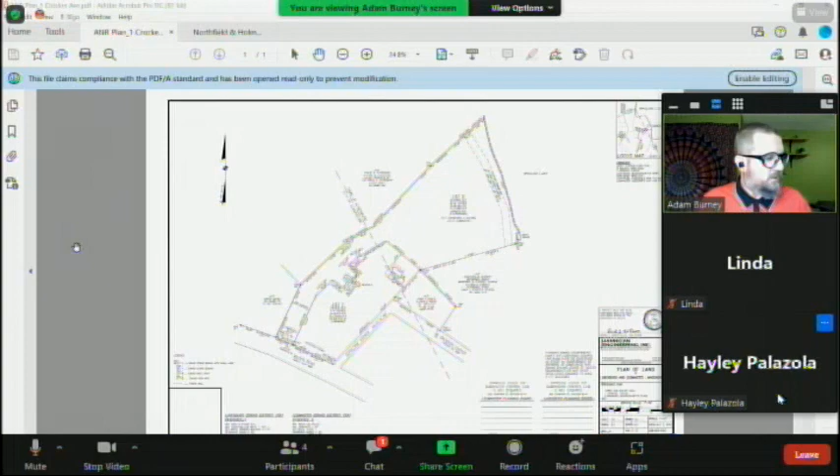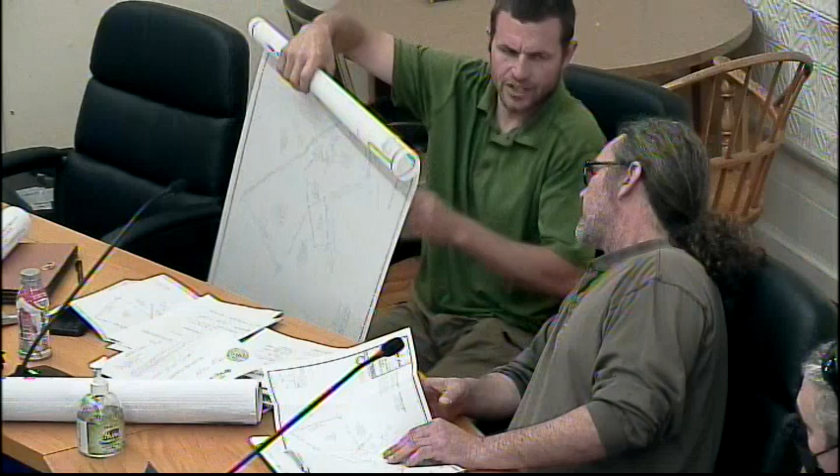I have a question for Adam, our land use director. Do we have approval from Leominster? I believe it's on the Mylar. I know the Mylar was dropped off probably end of last week, and I believe it had Leominster's endorsement on it. There's only one signature. I'm not sure if they allow their chair to sign. Did they allow that, Adam? There's only one signature on the Mylar. My guess would be that they've authorized the chair as the signature. Okay, good enough. I can attest to that. Thank you.

So basically, you're meeting the reduced frontage lot requirement for the lot size? Yes, sir.

This is certainly a unique situation. This is the first time I've seen something like this, for sure.

Have you had any discussions with the building inspector in Lunenburg? I personally haven't yet. But I can say that I know the water and the sewer will be municipal through Leominster, stuff like that.

This is not necessarily uncommon, though it's not something that happens every day. Most often, if the lot meets the requirements of frontage in the community where the frontage is, and lot size in the community where lot size is, these are permittable. They have frontage on a public road, and their lot, even if it were wholly Lunenburg, would be compliant. Often what happens in these instances is whichever community the building is located in takes the lead on permitting from a building perspective. We had a similar lot off of New West Townsend Road, and the building commissioner spoke with the building commissioner in Fitchburg. The frontage was in Lunenburg and met our frontage requirement, but the building was being constructed in Fitchburg, so the Fitchburg building commissioner would have been the approving authority on the permit and the inspecting authority as construction happened. I would expect a similar situation here, and based on the shape of the lot, the house would have to be in Lunenburg.

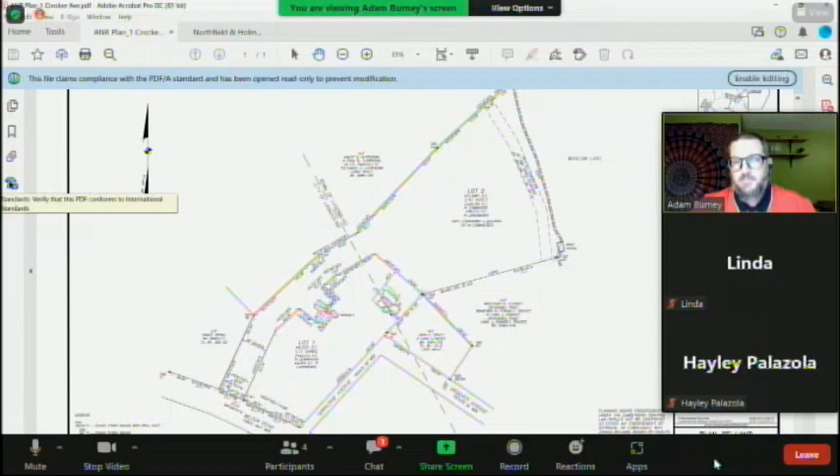Now, it's not unusual for us to see the 175 width dimension on our plans. That's not a requirement for the ANR, right? It is not. Okay, but you're aware that we have it. Yes, sir.

Certainly a complicated situation. I don't think I see anything that precludes the ANR portion. No, I don't see a problem with it. I would just caution you, I'm sure you're aware, that it's subject to the building commissioner's approval and whatnot. Yes, sir. So at this point, it's just lines on paper until they file for a building permit, and then the building officer looks at it and says that's conforming. Right.

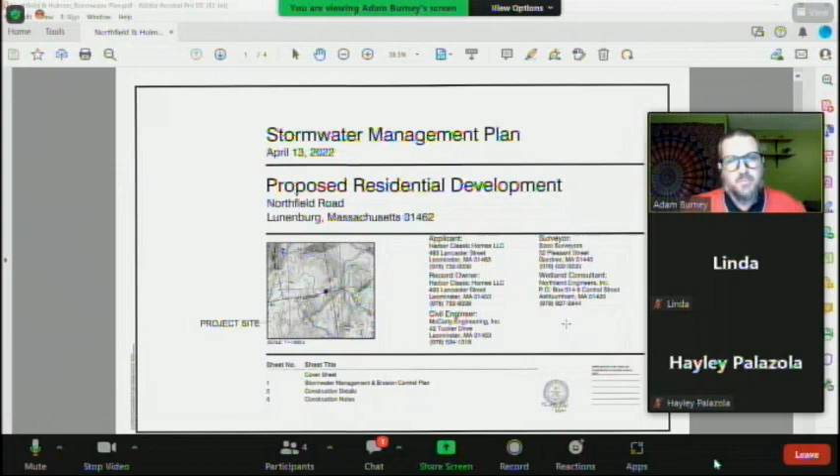Materials are available for viewing at the Planning Office, 960 Massachusetts Ave, Lunenburg, MA. This meeting will be broadcast live through local access cable on Facebook Live, on the Public Access Facebook page, and will be available on the Lunenburg Access YouTube channel within 24 hours after the meeting.

To participate remotely from... can I stop now? Okay, thank you. You said read it all. I follow directions to the T.

Thank you, Mr. Marchetti. Yes, sir, welcome back. Thank you. So, Brian Marchetti here, on behalf of Harbor Classic Homes for the stormwater management permit for an approximate 10-acre parcel on the corner of Holman and Northfield.

This 10-acre piece was subdivided a year or so ago into 6 ANR lots. The parcels have already been designed for a septic system. They've all been submitted by Northland Engineers and received septic approval. So I'm here now for one of the last pieces for the stormwater permit.

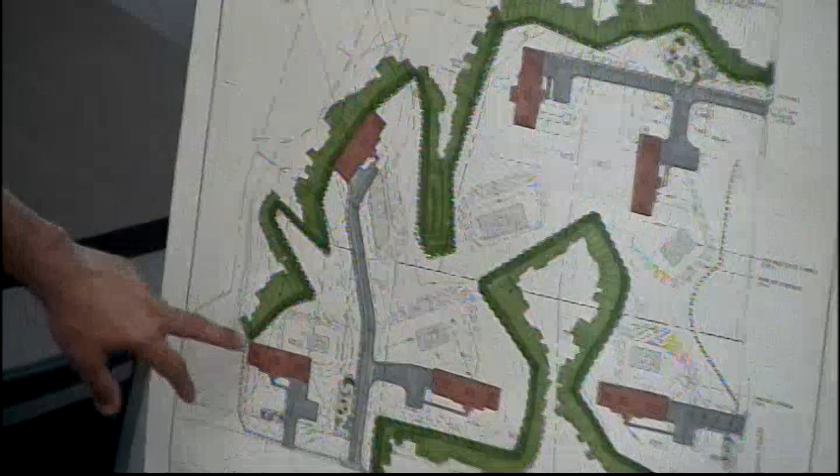So as we said, it's about a 10-acre parcel, divided into 6 lots. Lot A is the house at the southwest corner. Lot A, Lot 1, and Lot 5 are going to be served by a common driveway. Lot 2 is a parcel on its own, served by its own driveway. Then Lot 3 and 4 are off of Holman, also served by a common drive, 3 and 4.

According to the stormwater regulations, the Massachusetts DEP stormwater regulations, on a parcel or subdivision of a property with 5 to 9 lots that does not discharge to a critical area, which is our situation here, the stormwater management standards are applied to the maximum extent practicable. We are meeting all the stormwater management standards with the exception of the peak flow rates for the residential portion.

Also, the town of Lunenburg has its own stormwater bylaw that requires 60% total phosphorus removal and the 1-inch water quality volume. We have met both of those requirements for all the lots except Lot 5, in the rear, at the northwest corner. Groundwater is really high in that location, so even with an at-grade detention basin or rain garden, which we're using for phosphorus removal, we couldn't get a 2-foot separation in groundwater. So we requested a waiver for this lot only, just for the 60% phosphorus removal requirement.

So water will sheet flow off the driveway for Lot 5. It will stage up and be treated through that pea stone diaphragm, and then it will continue to discharge to the west and north to an existing drainage channel located on the western edge of this property.

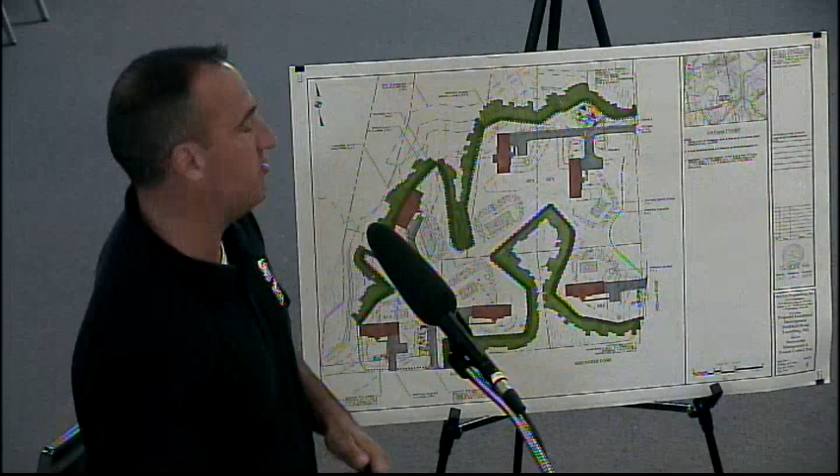So for Lot A, we've provided a pea stone diaphragm along the driveway and then a rain garden along the frontage of the property. For the common drive, we did the same.

Lot 1, the discharge from the driveway will sheet flow to a pea stone diaphragm. It'll be treated in its own rain garden. Lot A and Lot 1 both have a dry well system for rooftop runoff, so it's piped directly to a system below grade where that runoff will be recharged.

Lot 2, it's the same drainage design, with the driveway discharging to a pea stone diaphragm along the edge of the driveway, and it discharges again to a rain garden. And then we did the same thing for Lot 3 and Lot 4.

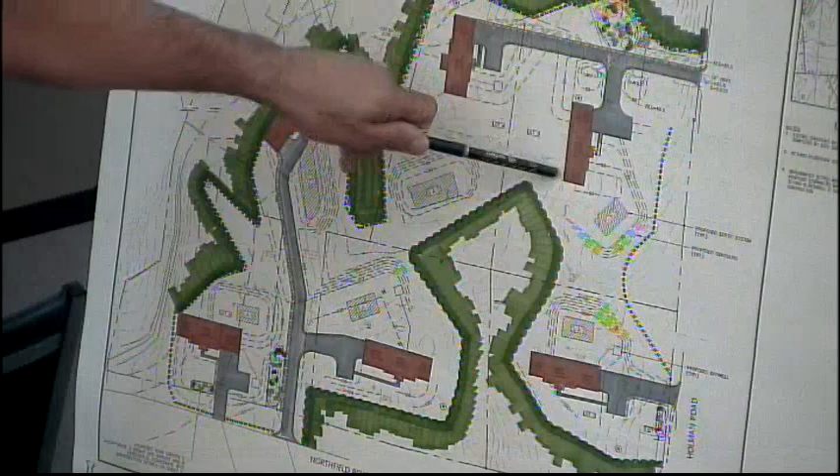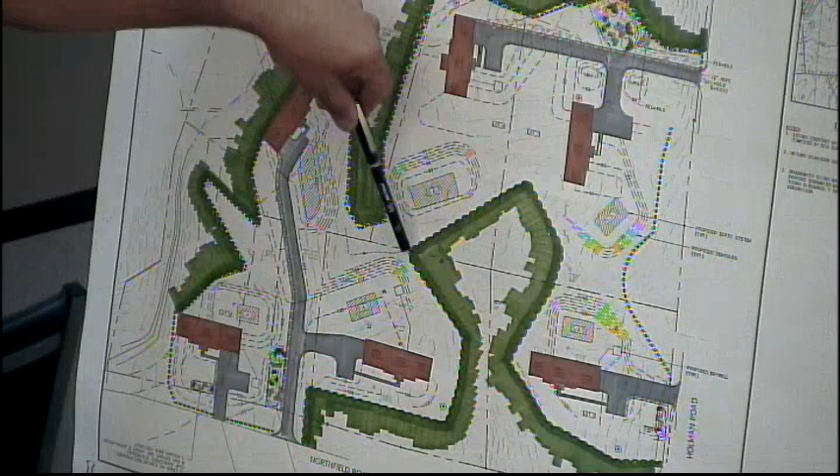In combination, the rooftop for Lot 3 discharges directly to grade and is actually culverted. Some will be collected in the rain garden that's across the driveway, but some will be discharged through a culvert under the driveway. We had to design 2 culverts here because the flows from the majority of this property all trend in that northeast direction.

So instead of allowing the runoff to just sheet flow across the driveways, which could lead to erosion in the future, we put small depressions in the yard with a culvert so it would be directly discharged underneath and controlled, so the driveway would never be flooded.

But again, Lot 3 and 4 both discharge to a pea stone diaphragm, and they're both directed to a rain garden system here to be treated and obtain that 60% phosphorus removal before they discharge off the site.

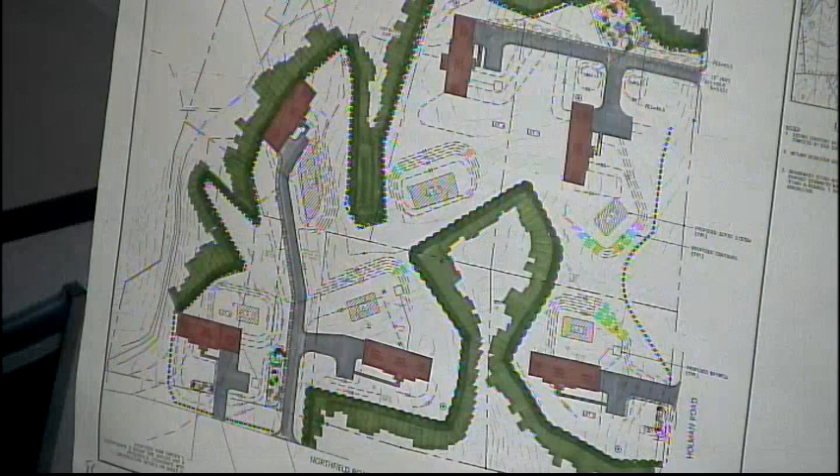So this drainage design was submitted to Graves Engineering, the town's review consultant. They did provide a letter back to us this afternoon. If I could go through, there are 6 comments, but there's really only 1 comment that requests some sort of plan change.

So I'm sorry, we don't have that, right? You do. We do. You should have. Yep.

Comment number 1 was, even with the implementation of the proposed stormwater best management practices, the post-development peak runoff rates will be greater than the pre-development peak runoff rates. Per section 204-1C9, the rate of runoff is required to be equal to or better than pre-development conditions. But furthermore, Section 204-1F2C requires that the stormwater management system design shall be consistent with the intent and guidance provided by the latest Massachusetts Stormwater Handbook. Per the handbook, the stormwater standards apply to the maximum extent practical for residential projects consisting of detached single-family dwellings, provided there is no stormwater discharge that may potentially affect a critical area. In GEI's opinion, the proposed stormwater management system meets the intent of Section 204. GEI defers to the planning board for further consideration, if any.

So this is consistent with all the other stormwater management permits that we've come before the town and permitted previously. Because they're residential developments, the stormwater management standards don't apply. But for developments with 6 to 9 lots that don't discharge to a critical area, they can meet the standards to the maximum extent practicable. So short of routing the entire system to a big centralized drainage system, typically the peak flow rates are the hardest ones to meet.

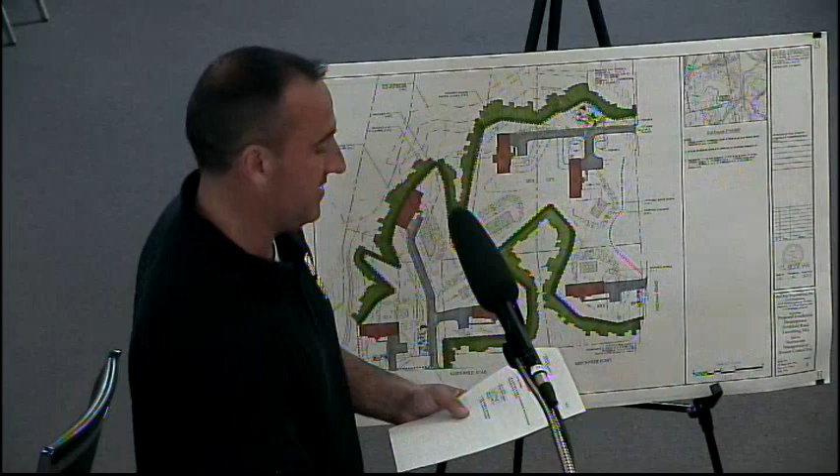Then comment number 4 and 5 both concur that the hydrology computations are found to be in order, and 5 is that compliance with the Mass DEP Stormwater Handbook is reasonable. And then comment number 6, GEI has no issues with our general engineering comments.

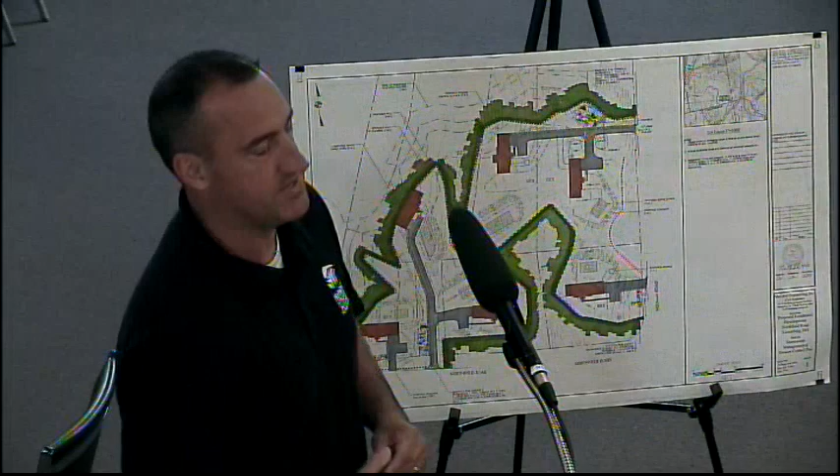We can answer any questions you have. And based on Graves' letter, it seems like the only modification to the plan is going to be to add a note for zoning for these lots.

And there's one other item that came up this past week. This site is being separated between a couple different engineering companies. Northland Engineers did the septic designs and the notice of intent, but they had us do the stormwater management design.

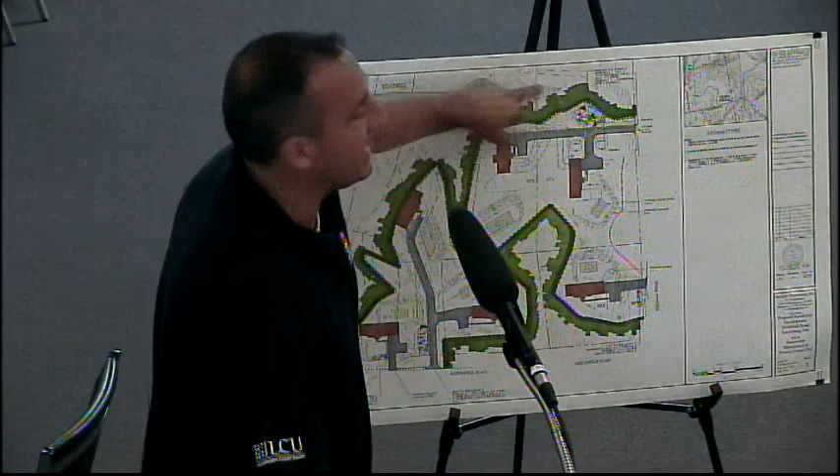Conservation had a comment that we had a house within one of their buffer zones, within a no-structure zone, but that's not the case.

All right, let's open it up to board comments, and then once we've gone through any comments and concerns for the board, we'll open it up to any public comment if we have anyone from the public that would like to comment on this.

Correct, yep, we have the one waiver request.

Not that I think we need to have the drainage calculations for every project, but this is the first one I noticed that we don't have them. You said you didn't meet the rate. Yeah, all the drainage calculations were submitted. I'm sure they're listed here on the Graves report. I'm just surprised they're not in front of us, which is fine because it's a huge amount of paper that we don't usually look at.

Can you tell us what the overages were? I printed myself the abridged version, so I didn't have to bring the whole report. For the 2-year storm, let's see here. So let me see here.

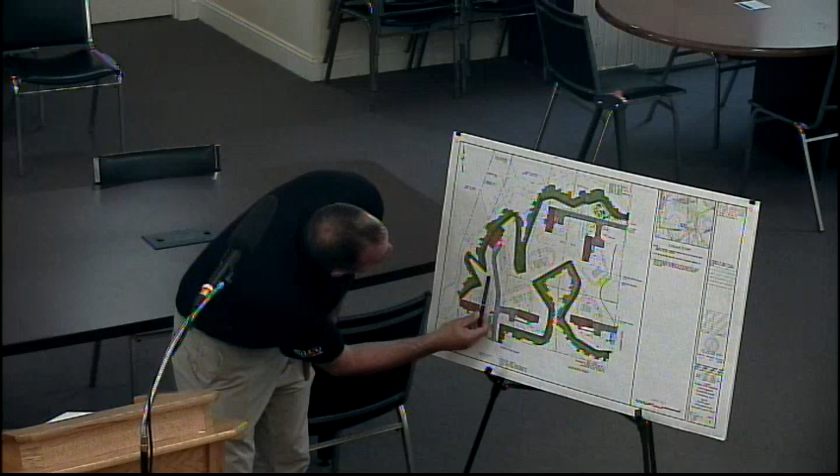So you don't think you could build something with a 2-foot separation from groundwater to the bottom and then size it enough to capture? No, not without, because we're running down, we're at 104 here, 103 in here, so we've raised the grade to get the driveway up higher so we could get the flows to get down there. Otherwise, this area is really flat, so there's, I would say, less than a 1% pitch across the yard here to get back to that.

And the septic system has to be incorporated into all the grading around this. Based on the test pits in the septic system design, that's why we're at 105 in the septic system. That gives us that minimum separation in groundwater here.

And speaking of septic systems, do you have the reserve trenches between the primaries? I'm not exactly sure how that was laid out. We didn't do the septic designs, Northland Engineers did, so I don't see any reserves.

The blurb you see for SAS on all these lots, the grading accommodates all of the primaries. So the reserves are adjacent to them, but none of them are to the wetland side. They're all within the footprint of the development.

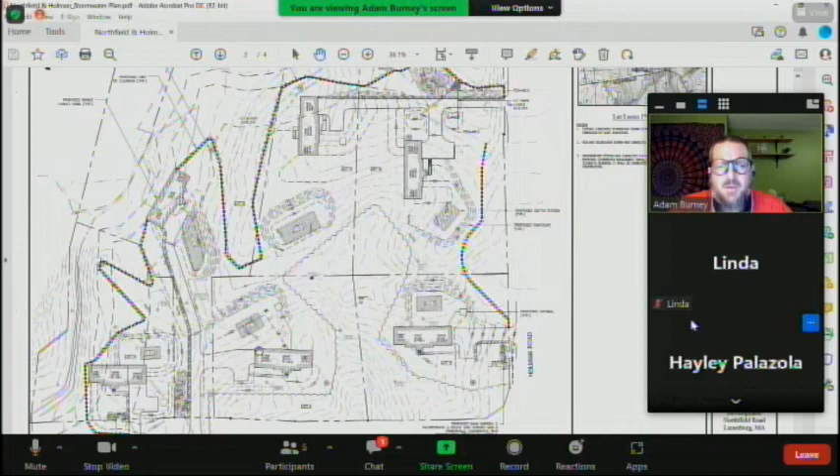I'm not clear on the Holman Street common drive. I thought it was intended to split the lot line. I do remember you giving relief on the Northfield common drive for the location on Lot 5 alone. If I'm recalling correctly, it was a scenic road issue where there was a piece of the wall that was not as substantial as the other wall, and the argument was made that that would be a great place for a common driveway, and the board agreed.

Yeah, that was my recollection, that on the Northfield Road side we granted a common driveway for those two lots. So lots 1 and 5 would be serviced by a common driveway that wasn't divided by the lot line, to minimize the disturbance to this scenic road and the wall. That is also my recollection. And I think at the time there was not a formal...

...location for the homes on lots 3 and 4. They had indicated that they intended to do a common driveway, but they were unsure what the layout would look like. They were waiting on soil testing for their septic systems, and that was going to drive the layout of where they put the houses and how the driveway interacted with Holman Street.

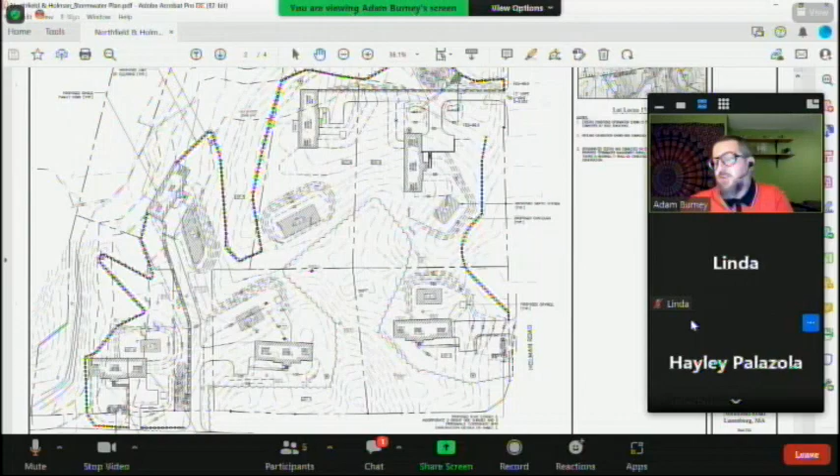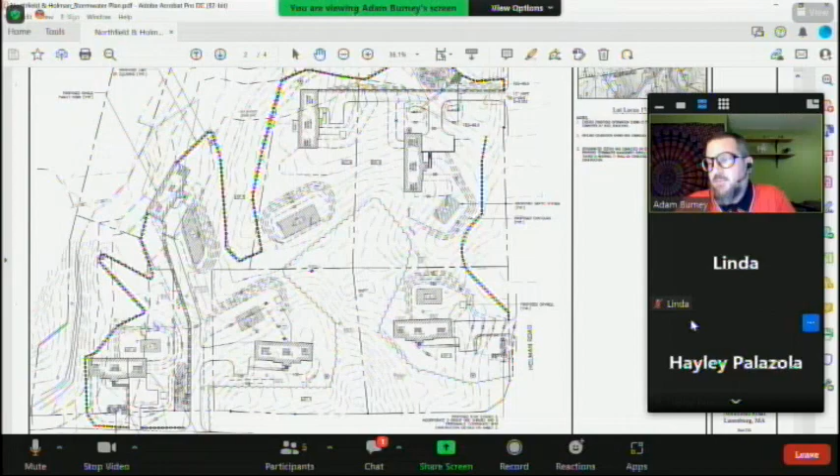I think the example would be much like Lot 5. By the definition, Lot 1 has no frontage because access is being provided through another lot's frontage, and that's permissible under the common driveway statute for specific reasons the board felt were appropriate. I'm not saying the other instance meets those same requirements, I'm saying the presence of that bylaw negates the requirement that you access through your frontage.

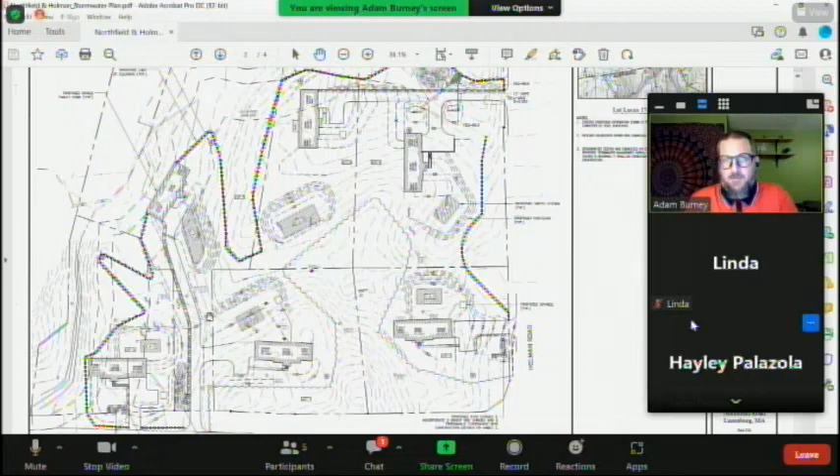I'm just realizing that Lot 4 is landlocked on this plan. It's a scary thing, because its property lines both go past the wetland boundary. So we apparently approved an A&R that was inaccessible.

I don't believe the presence of wetland is enough to disqualify approving the A&R. Even if it's a full blockage, it has to create a truly illusory access issue, and just wetland that could theoretically be approved to be altered by the Concom doesn't qualify as a problem for A&Rs. I'm working from memory on that, about a year and a half old, but I'm pretty sure that's correct.

We had a similar issue on another A&R and had that discussion, and that point was brought up, but there were a couple of interpretations of that. I think to the extent that we need to address the stormwater permit, that's really what we need to focus on, and to the extent these issues play into that, we need to address them, but some of this is certainly outside the scope.

I don't disagree with you, because this is outside the scope of the stormwater permit, but as I said already, we received a bunch of hand sketches on napkins and approved a bunch of stuff. We kept asking for better sketches, better sketches, better sketches. We did not get them. I'm not happy at all with this.

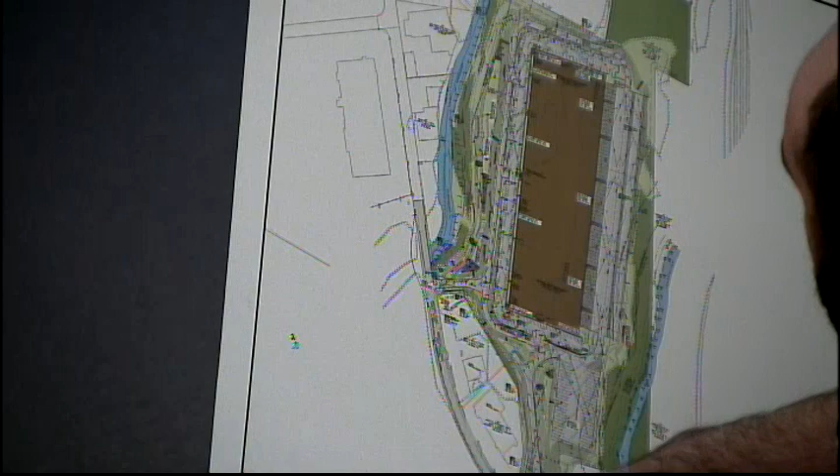Just to give a quick overview, currently this is a property that's located both within the city of Fitchburg as well as the town of Lunenburg. It's split almost 50-50, with the Lunenburg property line being shown right through here. It partially bisects the proposed building and splits effectively the land between the Nashua River and the Baker Brook. Currently, the property is a vacant parcel of land. It's been utilized by the city of Fitchburg for various uses over its entire lifetime.

Part of it's utilized for recycling of compost materials, general refuse disposal, as well as sand and gravel operations. So it's an extensive redevelopment project on behalf of the applicant, but it's the intent of the applicant to construct a 367,000 square foot warehouse distribution center building. Access will be provided off of Crawford Street and Airport Road, which are effectively the same road, it just splits a little bit down the road from one another. These access points will be located within the city of Fitchburg, so there won't be any direct tie-ins to the town roads of Lunenburg itself.

Access is going to be provided via two entry points, one being located along the Nashua River, or the Crawford Street entrance. That'll be utilized exclusively for employee and visitor entrances for typical pedestrian vehicles. The airport road, which is the more southerly roadway you see on this plan here, that will be utilized primarily for truck entrances. We're trying to separate the traffic flows as much as possible, so it's the intent that that roadway will be utilized for truck traffic.

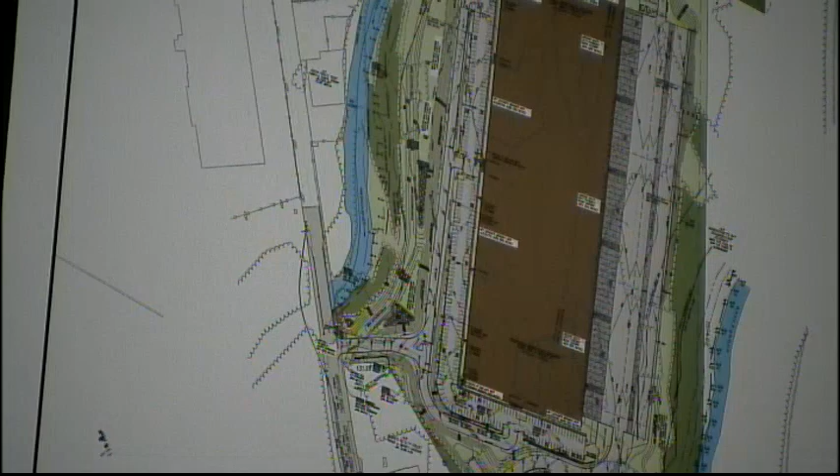Do you have a landscape plan prepared? We do, it's a form of a landscape plan. We are providing landscape trees around the perimeter of the site to be compliant with the town's regulations. Fitchburg also has a second level to that, so we're providing landscape beds and mulch beds around the site as well. One of the added benefits of this project, might not be as considered to the board itself, but the project is located extensively within riverfront areas of the Nashua and the Baker Brook.

Within both of those areas, we're actually providing an enhancement of the riverfront. We're cleaning up some of the invasives, fixing some of the degraded materials, because if you were to drive out there today, it's not the prettiest site in the world. Some areas are sand and gravel with rapid erosion. We found a concrete pad that was pretty much several hundred feet wide in one area that was used for, I believe, wastewater treatment at one point in time. So there's a lot of stuff out there, but it's our intent to clean that up and restore quite a bit of the riverfront area on this project, both within the town of Lunenburg as well as Fitchburg. We'd be utilizing primarily wildlife seed mix and pollinator mixes to help boost that issue that's currently widespread through our area.

Any other questions or comments from the board? I haven't read through all of Graves' comments yet, but one thing on the zoning bylaw regarding site plan review is that the proposed parking spaces are 18 feet long.

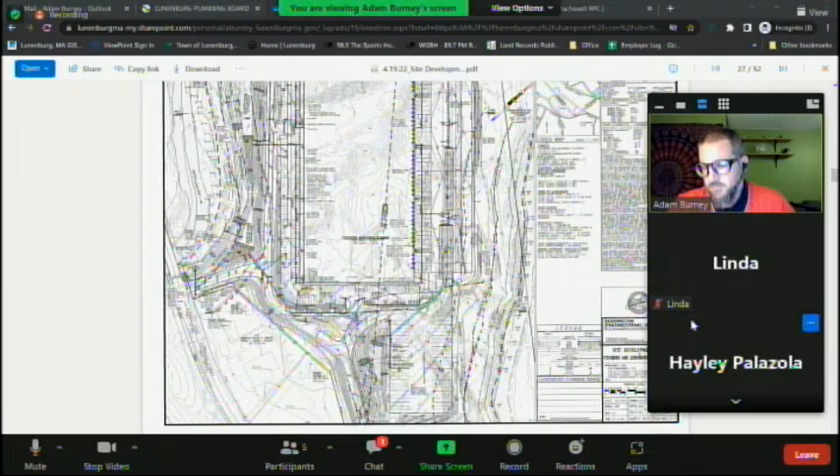As a matter of timing, I just want us to be on the same page. Yep, absolutely, thank you for that input. This is certainly a unique situation where you need approvals on both sides, and my thought process would be that we'd leave the hearing open until you're all squared away on the Fitchburg end of things, since the majority of this project is in Fitchburg.

Is there anything anyone else would like to add? There's certainly a list of peer review comments that need to be addressed. Do you have a meeting scheduled with Fitchburg at this point? Yes, right now we're on the docket for the end of June for that meeting. So realistically, we should probably continue this out beyond that.

In theory, yes - I don't know when the board meets in July, I know that's a hectic time frame for any board. But at least tentatively, let's pencil in the first meeting of July if at all possible. That way we should be at least a good chunk through Lunenburg Conservation and Fitchburg Conservation, and have had at least a second round of review with the Fitchburg Planning Board.

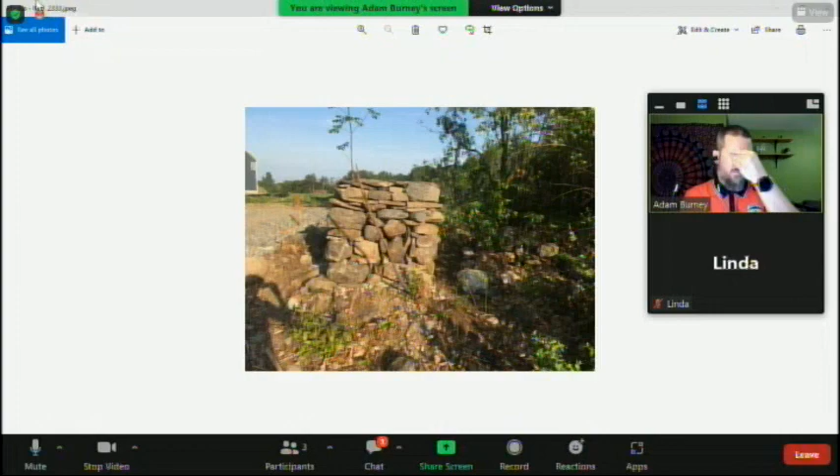I believe you all have received the email from Mrs. Whalen across the street, and what's on the screen out in front of you is what was constructed to be the terminus of the stone walls for the scenic road at the driveways.

I'm not going to put a value judgment on what this is, good or bad. I guess it was expressed to me that folks feel that this doesn't meet the discussion that was put out at the scenic road hearing. It certainly is a more constructed and planned pile of stone, as opposed to the stone walls that we see here in town. And it was raised to me that this may not be in character with the stone wall and may be in opposition to what the intent of the scenic road approval was.

In addition to that, there were some concerns raised about the width of the driveways. I didn't have a tape measure with me the last time that I was out there. I had intended to visit the site today, but was unable to.

So I will be verifying that the openings are the appropriate width. But really tonight I want to discuss the terminus of the wall, I guess is what I'll call it. I don't want to prejudice anybody on whether or not they feel that it meets the character of the area or the character of the stone walls that exist. All right.

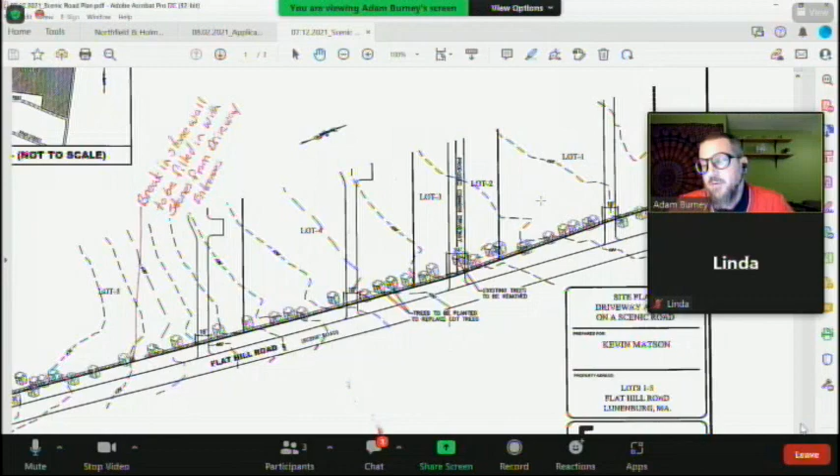Again, I suspect that they have not installed the septic system at this time either, because they were putting in foundations and some of the septics are in front. And what was indicated to me is that the site contractors were coming back sometime this week to continue working. It sounded as if they were going to be buttoning up the sites around the foundations of houses they'd started constructing. It would make sense to me that they wouldn't have put the septic systems in when they were going to be dropping lumber and bringing the concrete trucks and whatnot in.

And I did look through your email and the list of violations of the working hours, and I'll be working with the building commissioner to get that sorted out with him, because he needs to abide by what the permit says.

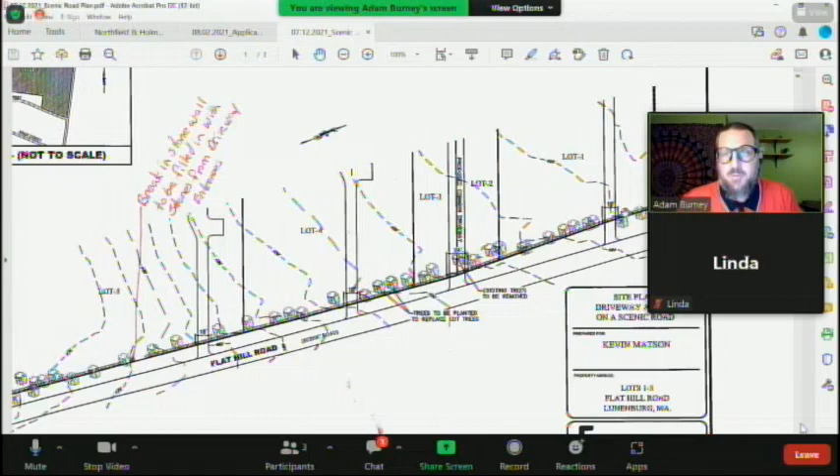Adam, you indicated that the applicant will be coming before us to adjust a lot line. Can you elaborate on that? That was my understanding, yeah. Okay, so this is not the plan I thought it was going to be, but the utility pole 24 is in this vicinity here. I don't know if you can see where I am. Yep, and so it's serving lot 1 by coming in through here.

And they had above ground utilities cutting across the bottom corner of lot 1. And according to what I'm told, Unitil doesn't allow you to fly utilities over a lot that's not yours. So I would expect that we will see the lot line between 1 and 2 shift in this direction to encompass the area where that above-ground utility line is flying, in order to get it to the pole that's out on the driveway before they dive it down to serve 2 and 3.

Okay, so essentially there's no change in terms of trees being removed or the stone wall? No, it shouldn't affect any of the scenic road stuff. It's just going to be a thing with Unitil to ensure that they meet the regulations they have to for the installation of the utility line.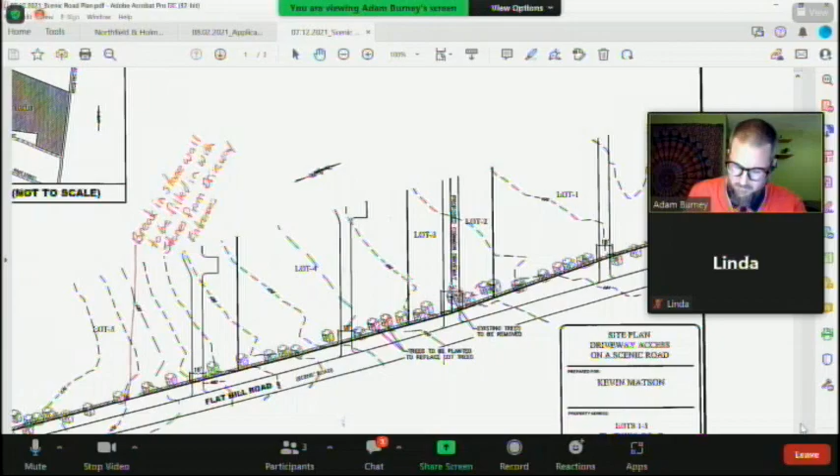Is there anything else you would like to add? No, I think I covered everything in the email. Thank you very much.

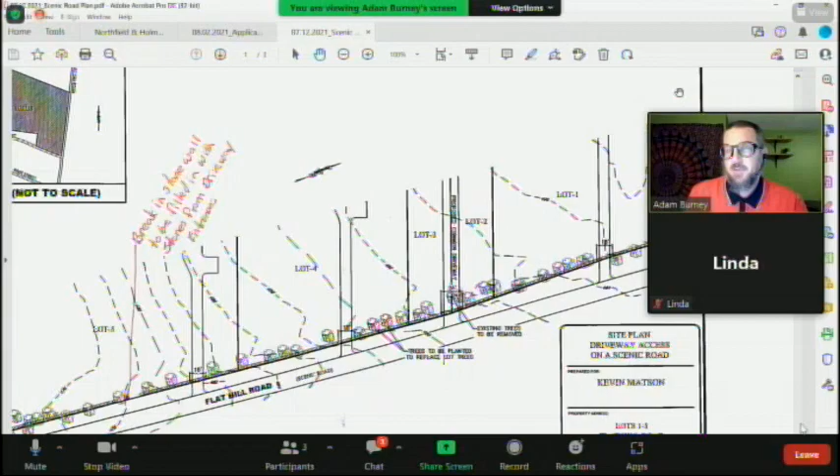I do want to thank Mrs. Whalen. It's not easy to keep track of everyone who's doing everything, and I know she thinks she bothers me a lot, but it's really helpful that she picks up the phone and calls and says, hey, I saw this, it doesn't make sense, can you take a look at it? So I want to thank her, and I want to reassure her that she's always welcome to call me if she has a question. Thank you, Adam.

She said thank you. Thank you. Thank you, thank you, thank you.

Do you have anything else for us, Adam? No, I think that's all I have for tonight. All right.